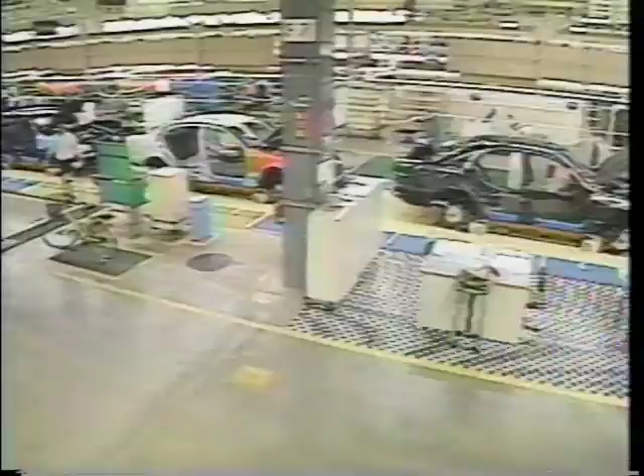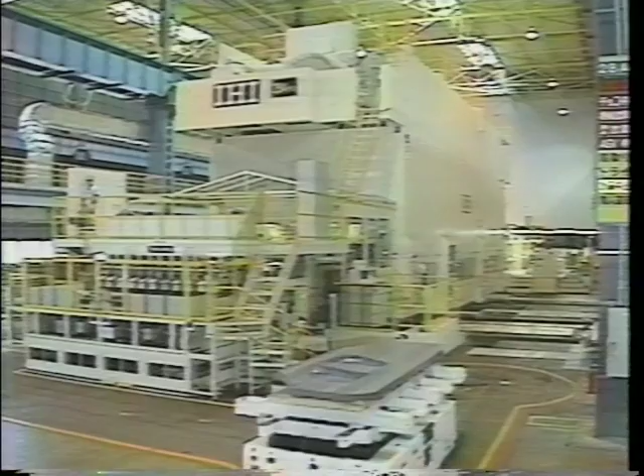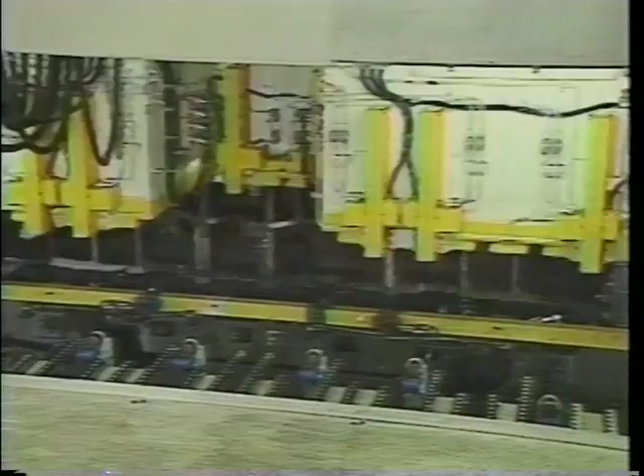An automobile is composed of more than 20,000 parts. The production of that car involves many varied processes. Here, we see one of those processes, a press machine used to form body panels. Pre-cut sheet metal is inserted into what is called a transfer press. Individual body panels are then formed.

This is the heart of the press forming process. Further details of press forming will be shown later.

Think of the tire. During tire production, liquefied raw material is poured into a mold and subjected to high pressure to form the tire.

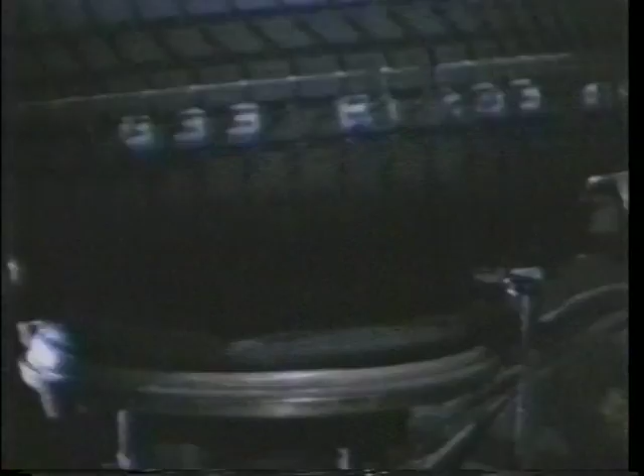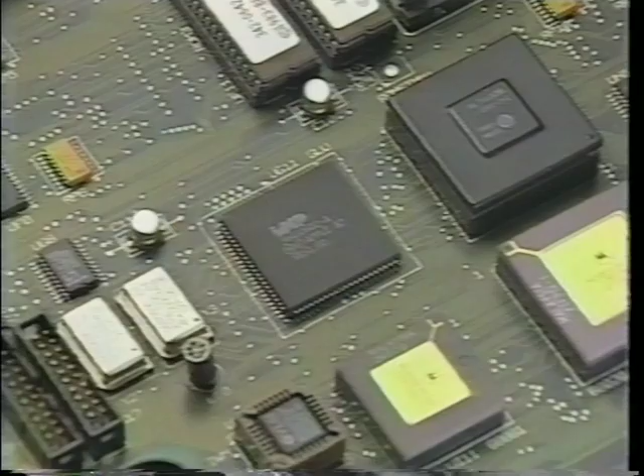The computer she is using is composed of various electronic components. The tiny parts used in ICs are also made by press machines. A computer requires a variety of precision parts, including the lead frame of an integrated circuit chip.

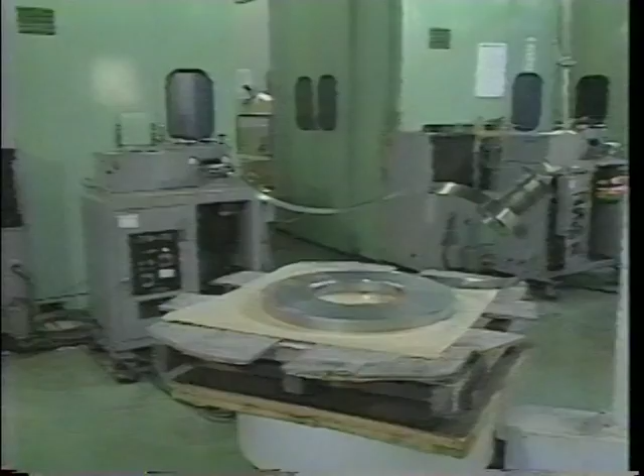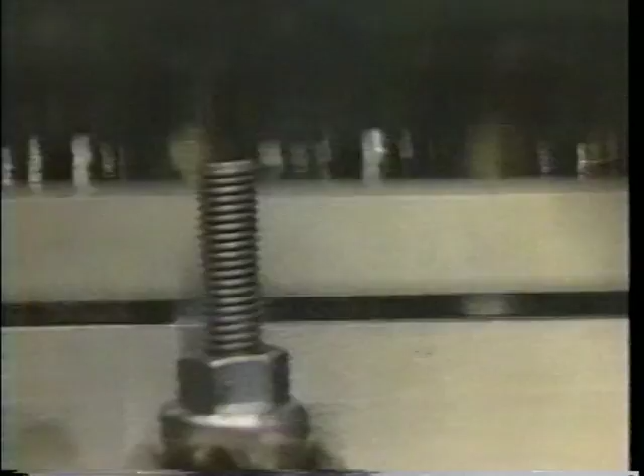Let's look at the production line of a lead frame. Lead frames are generally punched from metal stock 0.2 millimeters to 0.4 millimeters in thickness, at rates ranging from 800 to 1,200 parts per minute. Press forming is also at the heart of this example.

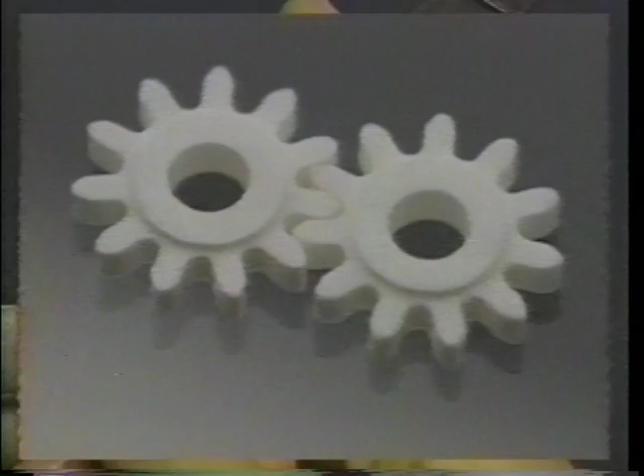The small gears of the watch she holds are made by a plastic injection molding process. These precision gears and other parts with detailed features such as models can be formed in one step.

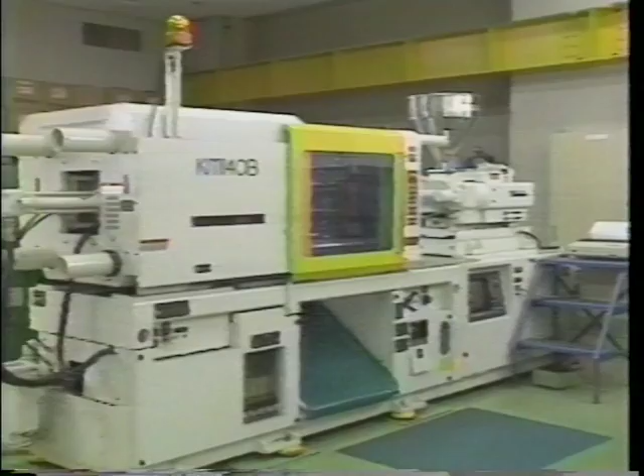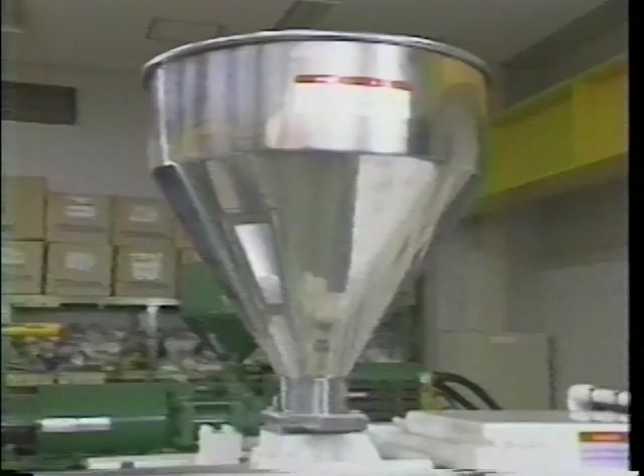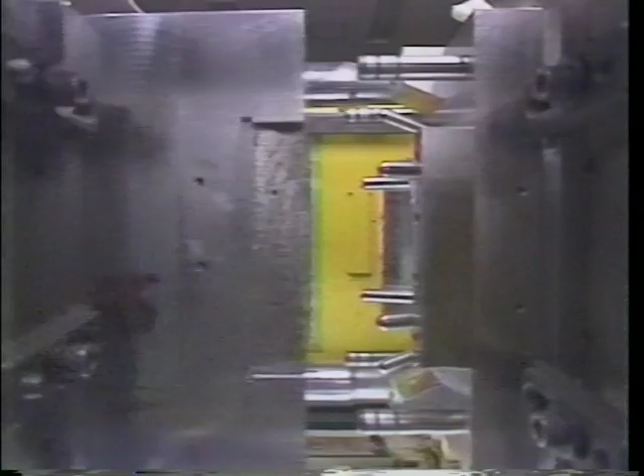This is an injection molding machine. This is the raw material. Raw material is put into a hopper and heated in a cylinder until it melts. Molten material is then injected under high pressure into the mold cavity of the die set to form the part. The die set is the heart of the injection molding process.

Here, we see a flower pot, which is also made of plastic. However, it is made by a process known as blow forming.

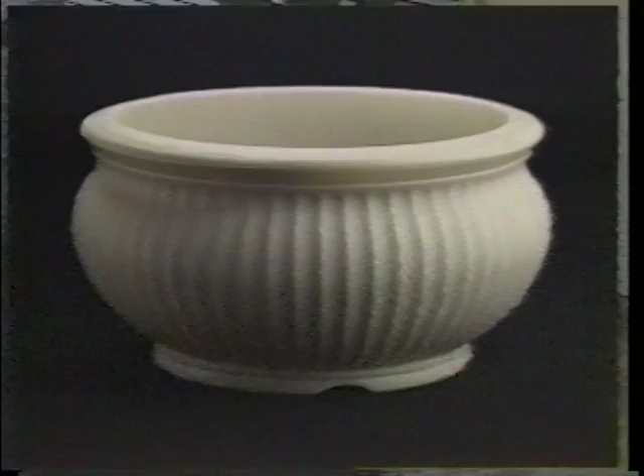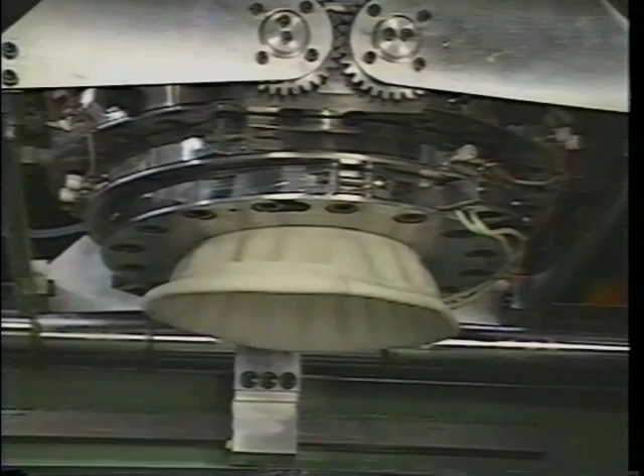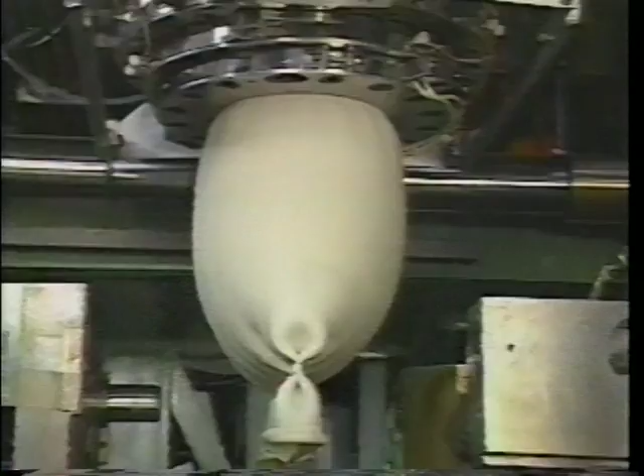The pot we saw in the apartment was made by this blow-forming machine. Like the injection molding process, plastic raw material is placed in the hopper, heated, and molten material is pushed out. The tube of material is pinched closed at one end, and air is blown into it, causing it to expand. This is what gives the blow-forming process its name. The part is then formed under pressure.

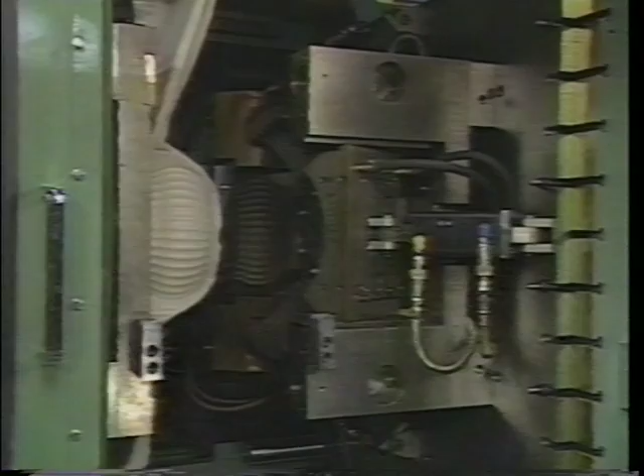The excess material around the pot will later be cut off and recycled. A die is also at the heart of the blow-forming process.

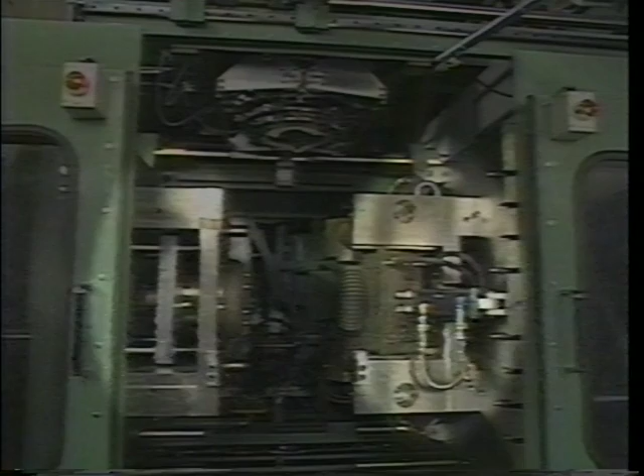The hollow products made by the blow-forming method are typically strong and lightweight. Plastic bottles and containers are typical products which take advantage of blow-forming techniques. Bottles such as this one can be produced in high quantities.

Psst, over here. Would you look at this model? This dune buggy car consists of all these parts.

Plastic, rubber, and metal materials make up these parts. To form these parts, various types of dies are required. All these parts came from somewhere. The die set is the mother of those creations.

Let's look at die sets through history. Our modern lives are surrounded by many products, most of which come from dies. The forerunners of today's dies can be seen by looking back to ancient Egypt. An ancient Egyptian wall painting shows people making tools with castings. Thousands of years ago, many people in other parts of the world were using dies to make ornaments, coins, copperworks, and earthenware.

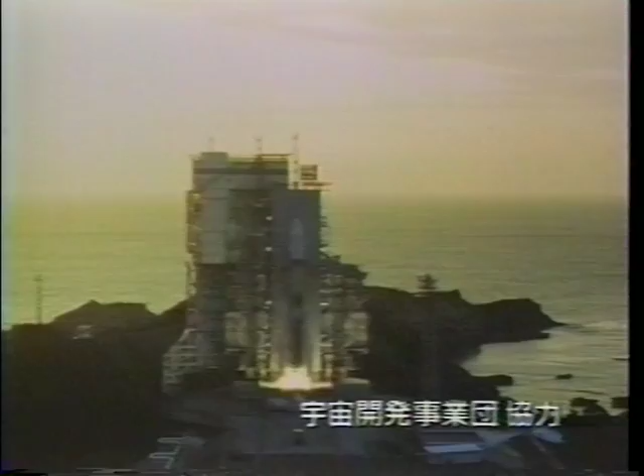Though the shape of dies and materials used have evolved along with the progress of technology, the basic principle of the die is still the same.

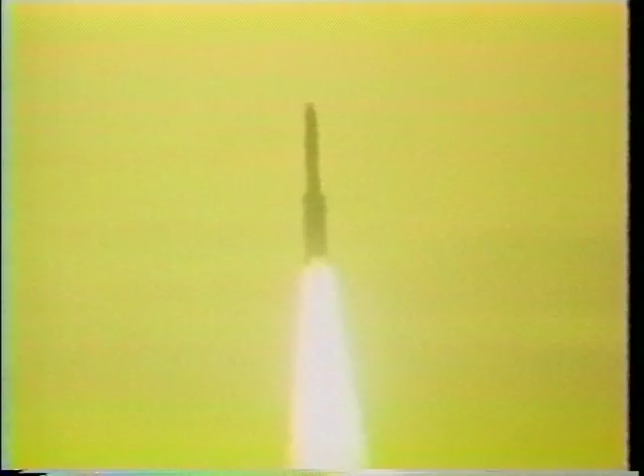Like I said before, dies are everywhere. Now can you see just how important dies are? Can't you, Mai? Who, me? Yes, I'm talking to you, Mai. How can the TV be talking to me?

Around you are many things of various shapes and materials, which require a variety of production methods. Most of these methods involve dies, and obtaining the proper die is a vital step in the production of parts.

Why don't we listen to a conversation between a person who ordered a die and the engineer who designed it? The car part that the designer had in mind was transformed by the engineer from concept to reality exactly as he intended.

I've worked hard for several months to see that every detail is correct. I'm glad to see that you are satisfied with the results of my hard work.

Now that we've shown you a little about dies, don't you find the world around you a little more interesting? Hey, Mai, why don't you come with me and we'll learn more about dies? Okay.

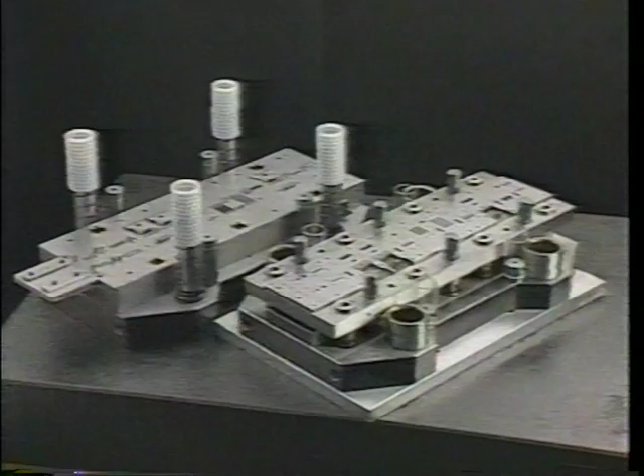This is a die used for forming lead frames. Ten different processes are performed at the same time by one press. During press forming, material is put under high pressure to form the desired shape. A precision die can produce finely detailed shapes, such as lead frames.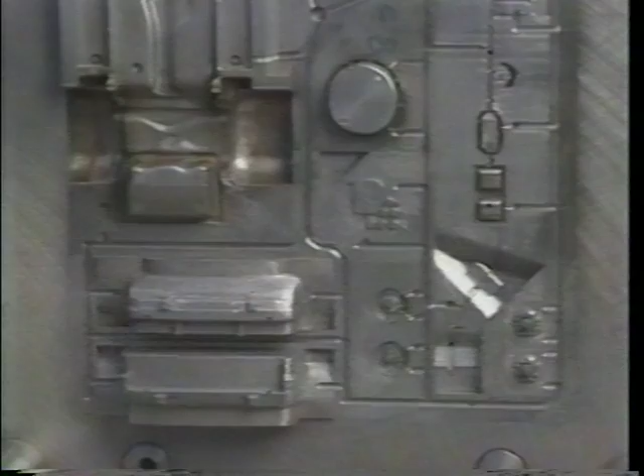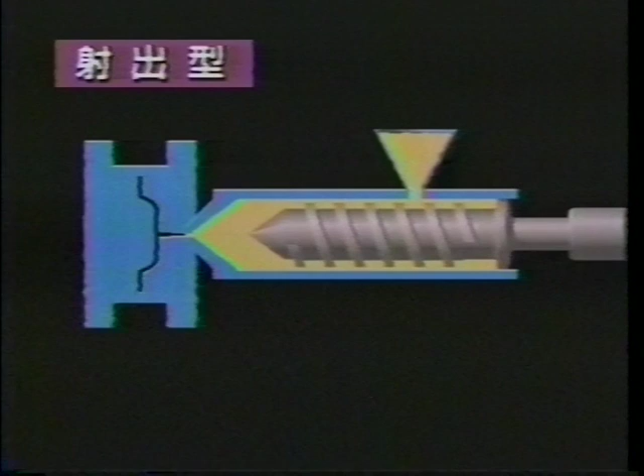During injection molding, material melted in the cylinder is injected into the mold. The screw is then drawn back. Material for the next injection enters the cylinder. The dies separate and the finished product is released.

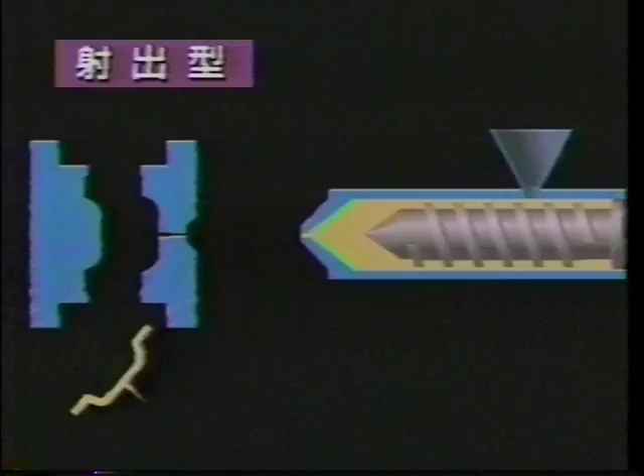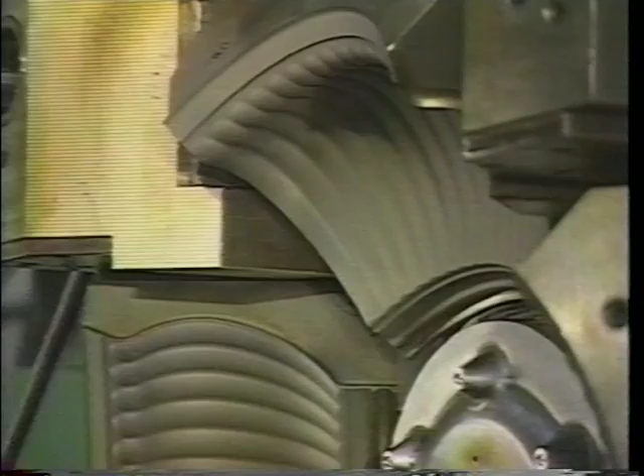This is the blow-forming die used to make a flower pot. This side of the die makes the inside of the pot, and this side makes the outside of the pot. Detailed curves create the surface of the pot. Therefore, the quality of the die determines the quality of the product, as well as the efficiency of its production.

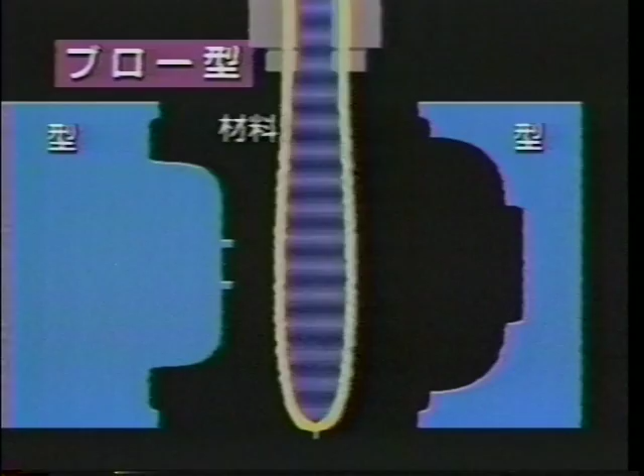During blow forming, air is blown into the raw material. The part is formed under pressure within the die.

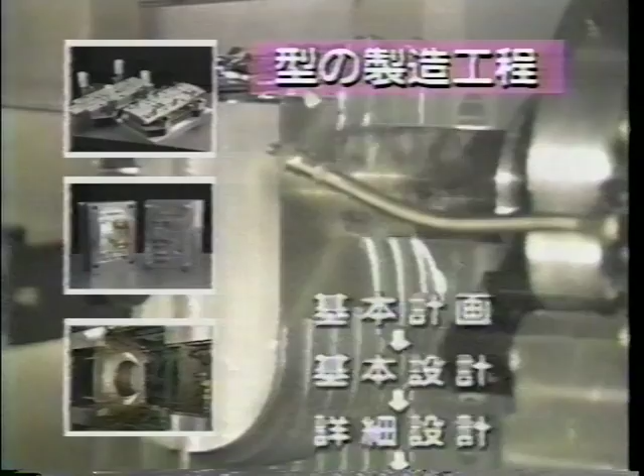The processes for making dies involve a great deal of machining technology. The processing steps include initial planning, conceptual design, detailed design, production planning, raw material preparation, machining, heat treatment, finishing, assembly and adjustment, and trial production.

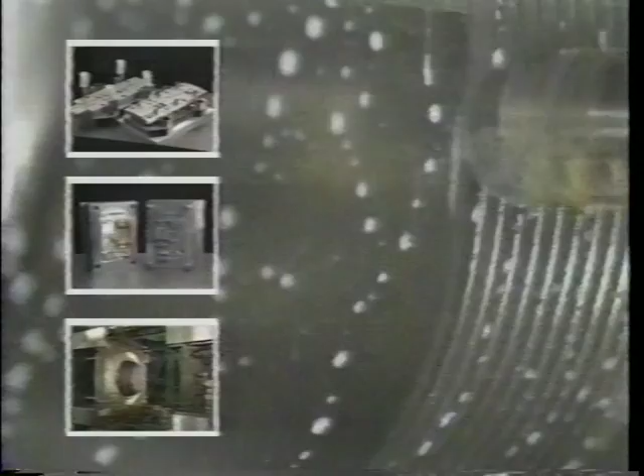The first step in the making of a product is the making of the die. The first step in the making of a die is the die design. In the production of a die, the design is very important. Die designs vary greatly depending on factors such as the raw material to be used and the production conditions.

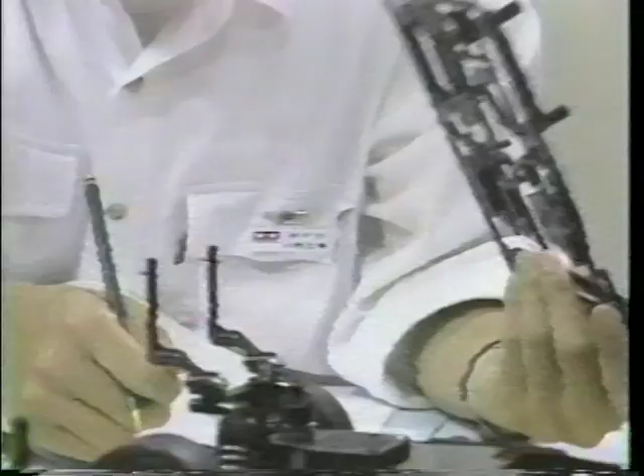This specialized die must function in combination with the forming machine. The design of the die requires specialized knowledge of all these factors.

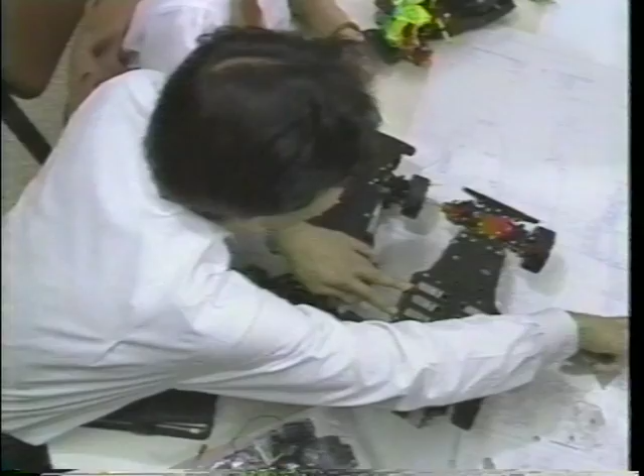Today, the making of dies is assisted by computer-aided design and computer-aided machining systems, commonly called CAD CAM. These systems contribute greatly to cost saving for design work and automation of the production process. Computer simulation systems, known as CAE, simulate testing of finished products.

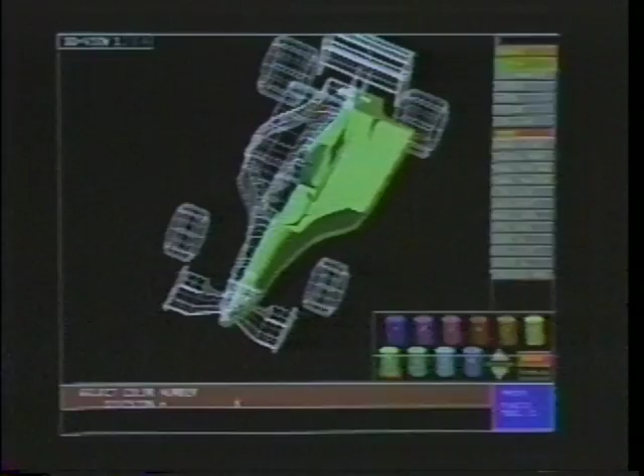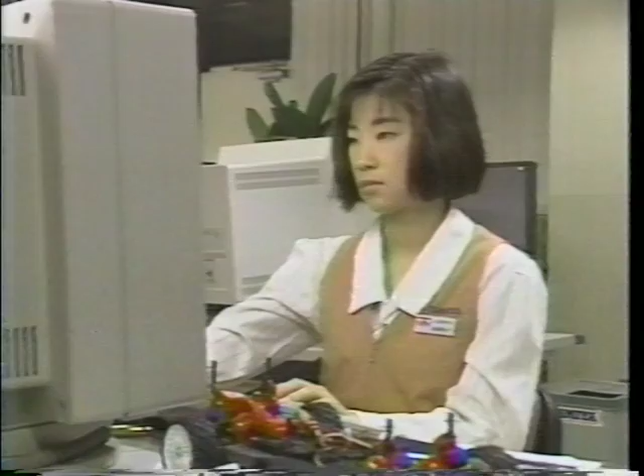Computers contribute greatly to die making. These computers are CAD workstations. Look at this. Here she is using CAD in her design work.

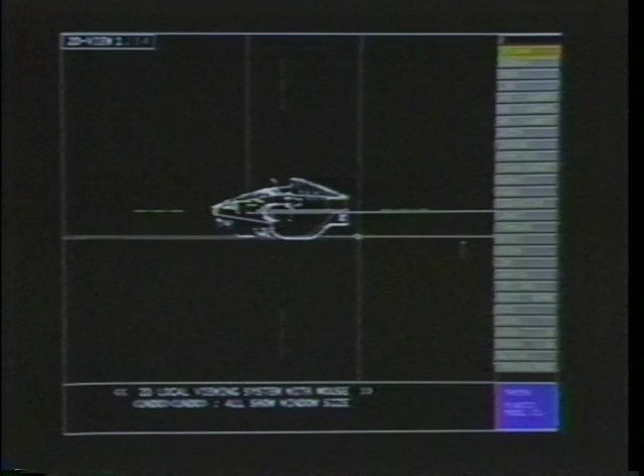The CAD system helps engineers automate the drawing function. On the screen, engineers can see a clear image of the product or die that they are designing. When designing similar products, an engineer can borrow computerized drawings and data from previous designs. CAD systems are powerful time and labor-saving devices.

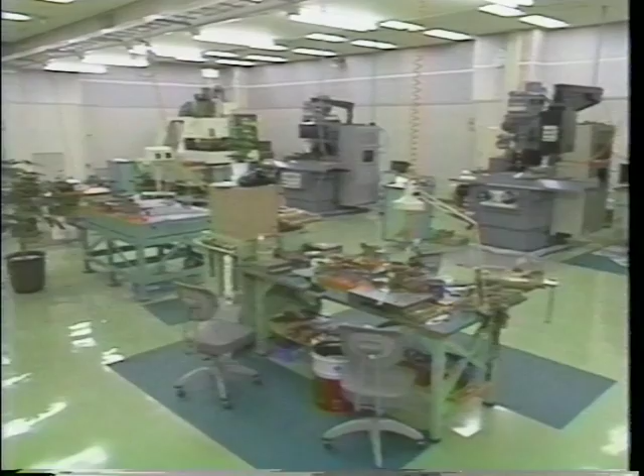Data accumulated by CAD systems can be transmitted to CAM systems, either online or by magnetic media. Upon receiving such data, CAM automatically operates numerically controlled machines, such as machining centers. With the aid of CAM, machines can work unattended.

Today, CAD CAM systems have become indispensable for die making. CAD CAM certainly is convenient for both the design and production of dies.

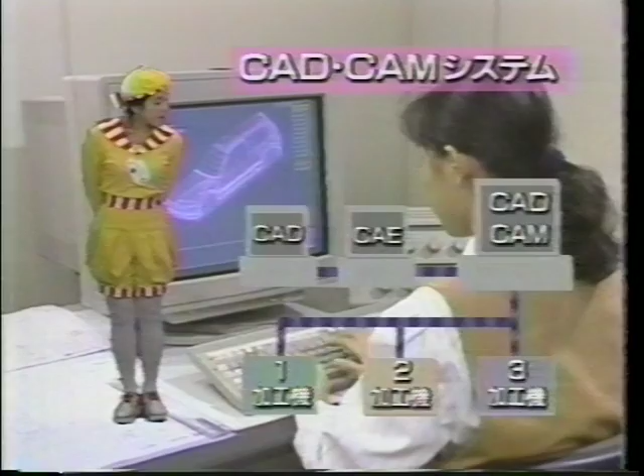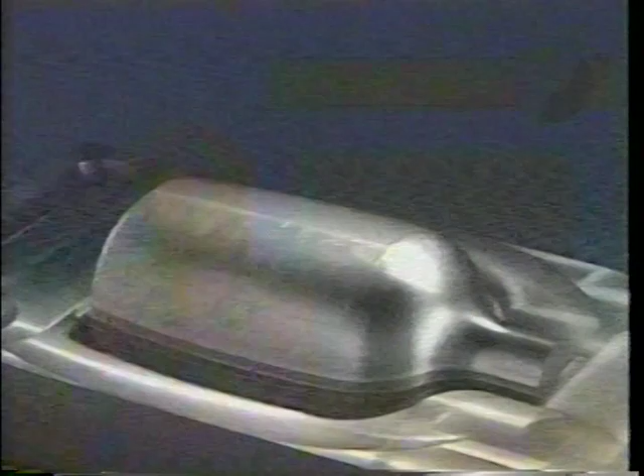Next, we'll look at die machining, which can be divided into three categories: cutting, grinding, and electrical discharge. Depending on the finished product, the die must be machined to precisions reaching the micron and submicron order. The most suitable machining process must also be selected.

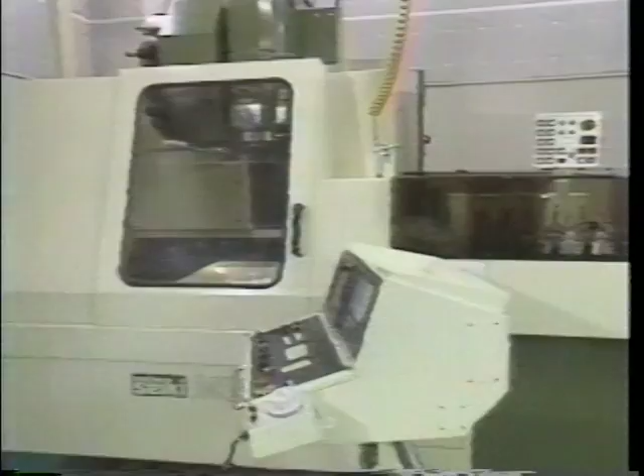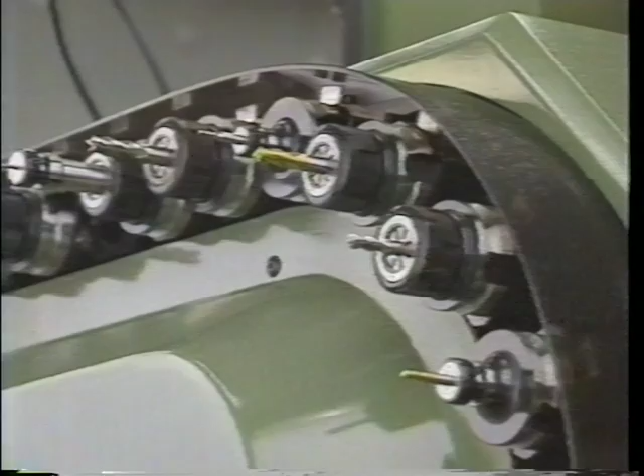This is a machining center. This machine can perform both milling and drilling operations. The die material to be machined is automatically selected and transferred to the machine. An automatic tool exchange system provides the proper tool. The machine then automatically performs the operation. The machining center is controlled by data transmitted from the CAD CAM system.